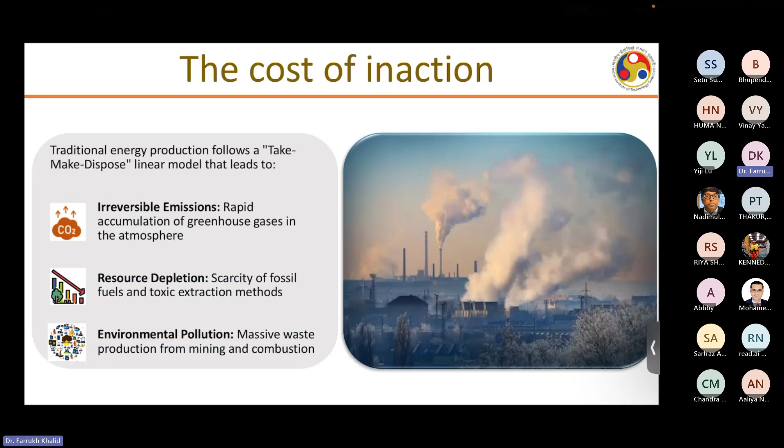And how do we come up with the conclusion of whether the energy solution we are looking at is a cleaner option? Primarily what we do is look at the technology from the lab scale, then look at its technical feasibility, then its commercial aspects, and later on also its environmental aspect. That usually, when you talk about the industrial level, is expressed in terms of LCOE and mostly GWP, the global warming potential of that technology.

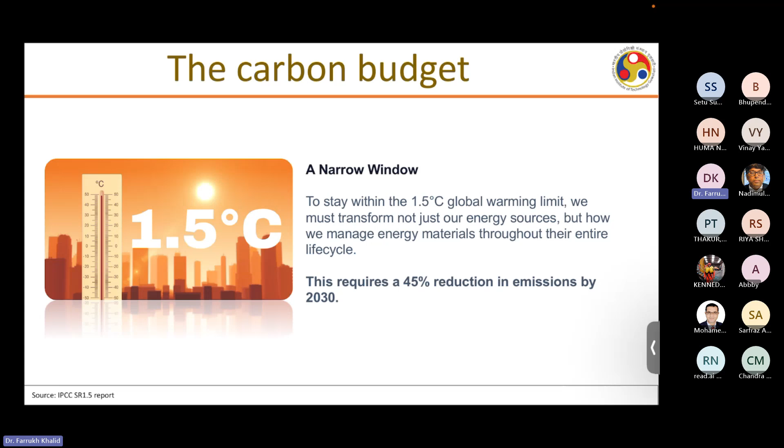So why do we all need this? Because it's very much obvious that the Earth has been regularly heated due to global warming issues, which is very pertinent. So in order to have this 1.5 degree global warming limit, it has been recommended that the reduction in emissions should be by 45%. And as discussed earlier, hydrogen could be one of the potential solutions for that.

So usually we all know that whatever aluminum we use is produced from bauxite, and then this bauxite is converted into alumina, and then from that alumina, using a Hall-Heroult process, which is an electrochemical process, we produce aluminum.

And then in secondary production, what we do is take whatever end products we have, like lots of aluminum cans, and whatever we get from windows and many other places, aluminum that is after its end use, and take it to the recycling factory. So that is also an energy consuming process, because most of the time this recycling is done at high temperature. So in order to achieve that high temperature, we need a source that can provide it, and that high temperature source usually comes from fossil fuel again.

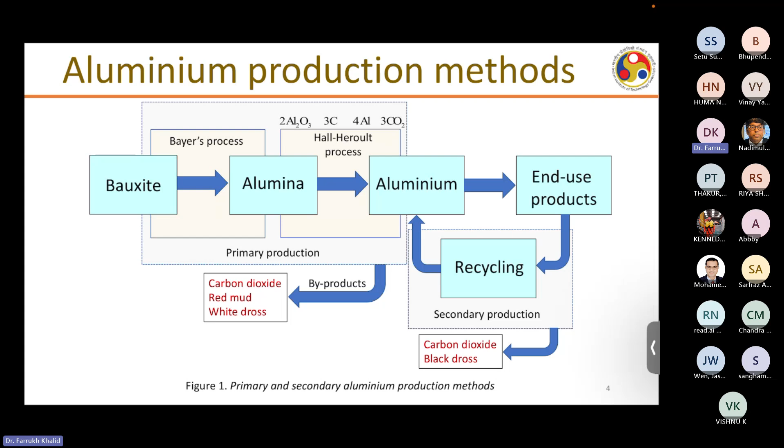So there are quite significant emissions being emitted at that period of time as well, the waste product coming out, carbon dioxide and black dross, when we do this recycling. This figure shows why we need to cut aluminum production related gas emissions, because it relates to around 3% of the world's industrial greenhouse gas emissions, and 8% of the global industrial electricity consumed in the production of aluminum.

When we look at it, most of the aluminum production emissions are coming from the electrolysis process, so that is around 70%.

That's why people introduced the concept that rather than going for the fresh hunt for aluminum, we can recycle it, which is basically a secondary production method. This requires around 95% less energy than we need to hunt or produce new aluminum, and it only emits 5% of the greenhouse gas emissions, which clearly shows the benefit of aluminum recycling, and helps in the circular economy concept. Through that we are trying to find different aspects we can use it for.

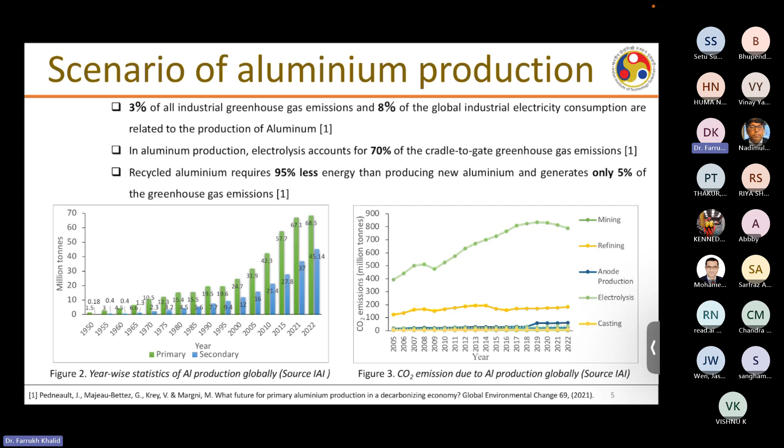So we need a strategy for how to utilize this scrap and convert it into more value-added products. One product we can convert it into is aluminum for sure, but can we convert it into some other more useful products? That is the journey we will talk about in this presentation, how to convert this aluminum scrap into fresh or new aluminum, or pure aluminum, and hydrogen. That is basically an amalgam of two processes: the aluminum production or recycling process, and thermochemical cycle for hydrogen production. It's an integration of these two, which we'll learn about in the coming half an hour.

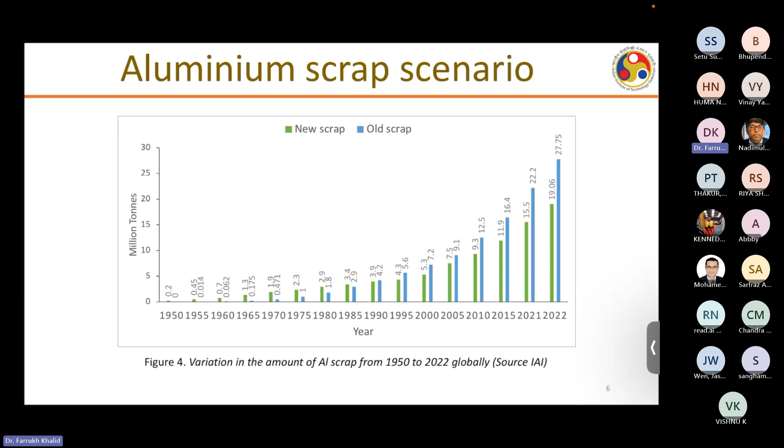One of the prominent reactions found in the literature is aluminum reacting with water, used to produce hydrogen. What happens is aluminum waste, whatever you have, is reacted with water, giving aluminum hydroxide, hydrogen is produced, and a lot of heat is generated. Due to the exothermic nature of this reaction, it becomes very difficult to control the hydrogen production rate, so this reaction is a little tricky to control.

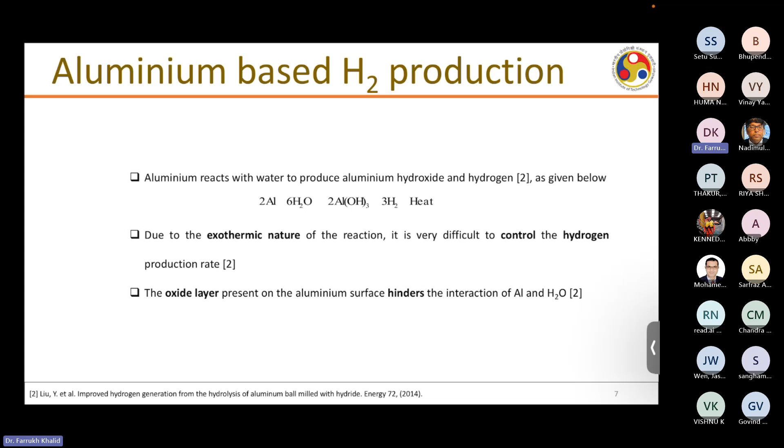People are looking for different methods to produce hydrogen from aluminum, and we have come up with another method we'll discuss. One issue with aluminum is that it's a highly reactive element. If left in the environment, it reacts with oxygen and produces an oxide layer, Al2O3, which hinders the surface of the aluminum, slowing down the reaction with water so you don't have enough reaction kinetics. That is another important aspect.

Just to brief about these thermochemical cycles for the new audience, since some people may have heard about it, some may not. The idea of this thermochemical cycle is that we want to split water thermochemically. As we know, any compound can be split, but you require a desired temperature and pressure to do it. For example, if we have water at ambient conditions, at 1 bar, and want to split it through the thermolysis process with the application of heat, you need a temperature in the range of 2000 to 2500 degrees Celsius, which is quite a high significant temperature.

But you can split it, so that water molecule will no longer be thermally stable. It can split into hydrogen and oxygen. So that is what we call a thermolysis process. Otherwise, what primarily we do is electrolysis; we have heard the name of electrolyzer everywhere. So what we are doing is that we are not splitting the water thermally, we are doing it electrochemically.

So in place of applying the thermal energy, we are applying the electrical energy. Thermodynamically, or ideally, you require 1.23 volt in order to split 1 mole of water. That's the ideal voltage, but there are certain losses associated with it: losses due to the membrane, and anodic and cathodic losses, which make the voltage around 1.8 volt.

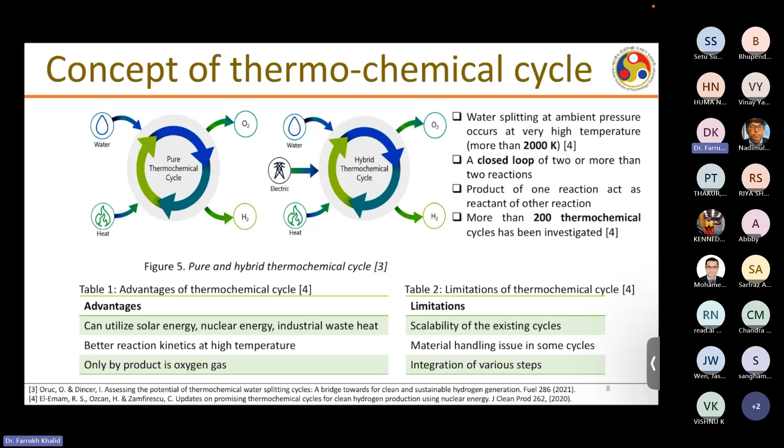And on the basis of delta H, we can comment about the reaction, whether this reaction requires heat to proceed or it will release heat. As we know, when delta H is positive, this shows that the reaction requires heat, or it's an endothermic reaction, and when it is negative, it will release heat, so it is exothermic. That we all know.

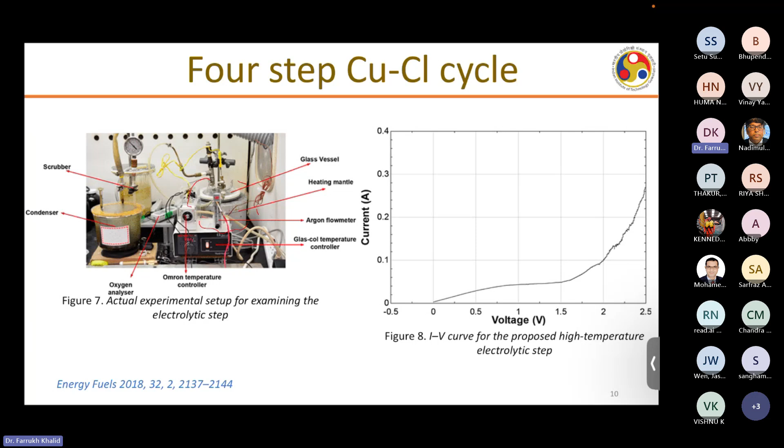The setup we used previously is a high temperature reactor, which is a vessel with a couple of electrodes and a couple of thermometers placed in it. The reactor is made of glass and heated with a heating mantle, and we put thermocouples to check the temperature inside and outside the vessel. Then we supplied the current, and through the current we electrolyzed the copper chloride, which is then used to produce it. So this was the electrolysis process.

What we do is first we heat this vessel using heating tapes, and once the desired temperature of 773 Kelvin is reached, we electrolyze the liquid copper chloride, because if you supply current to a salt in the solid phase, there will be no ions, so the current will not pass. So you need to change the phase. Either you make it aqueous, then the current will pass, or you liquefy it.

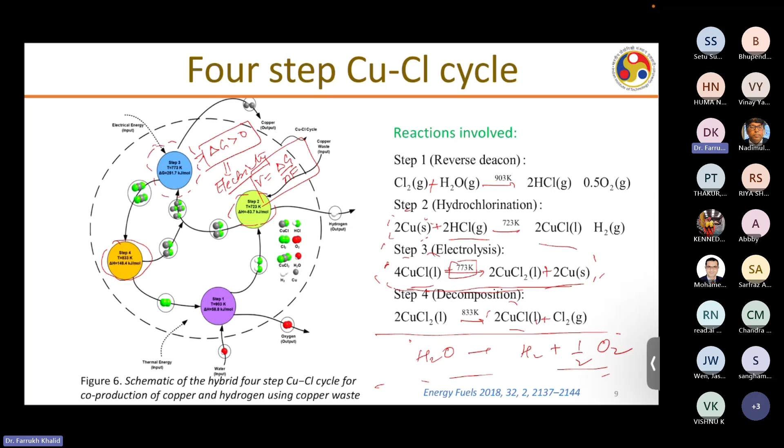The melting point of copper chloride is around 430 degrees Celsius, so we choose a temperature close to that, because any temperature beyond the melting point will be a wastage. To be on the safer side that the desired temperature is reached, we keep it at 773 Kelvin. Once this temperature hits, we supply the current through the potentiostat and electrolyze this product, and the electrolyzed products are further used in different steps of the cycle. So that was one thing.

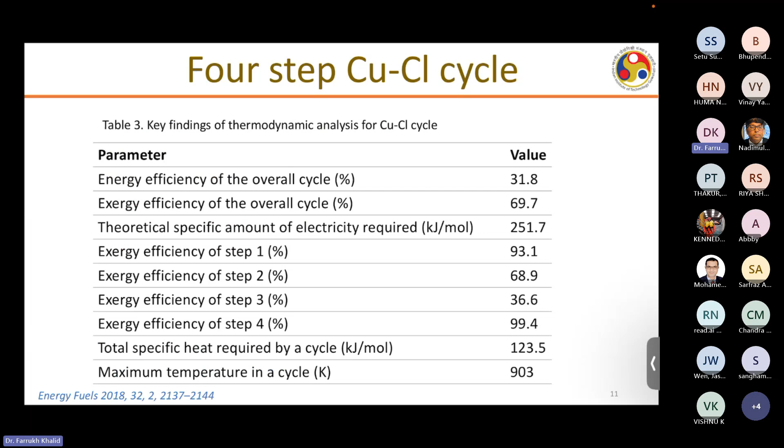This cycle was also studied thermodynamically. Whenever we analyze or come up with such cycles, our group first checks the thermodynamic feasibility of any new concept, usually through the first law and second law of thermodynamics. Once the results are acceptable, we go for designing the experimental setup. Similarly, in this case we performed the energy and exergy analysis of the cycle, and found the ranges were acceptable and comparable to other cycles in the literature, which gave us a boost to design our setup.

Now, coming to the motivation, what is the reason for the aluminum chlorine cycle? This is the current project I am handling at IIT Guwahati, and one of my PhD students, Vinay Yadav, is actively working on it. We have a grant from ANRF India on the utilization of the aluminum chloride cycle for hydrogen production and pure aluminum. So that was the idea.

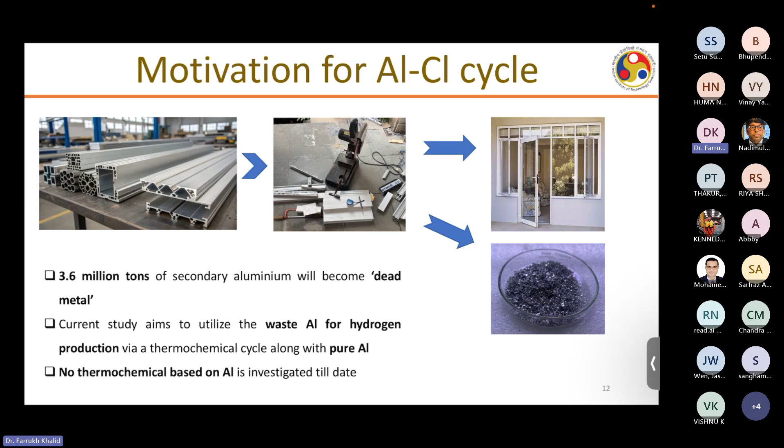As we can see, there is a lot of aluminum waste and many other things. So what to do and how to do it? That is what we call dead metal. So the innovation comes in that so far no thermochemical cycle based on aluminum chloride has been investigated in the literature. That gives us a very good boost that there is a window of opportunity where we can work on it, and then it can be used for hydrogen production as well as for pure aluminum. So this cycle again comprises three steps.

One is a hydrochlorination step, the other one is an electrolysis step. But the electrolysis carried out here is in the molten phase, so it's a salt electrolysis. We know that there are different phases of electrolysis: we have aqueous phase electrolysis, gaseous phase electrolysis, and liquid phase electrolysis. In this case, we have a molten salt electrolysis that we can classify as a liquid phase electrolysis. So we are liquefying the aluminum chloride powder, and then we supply the electricity to get the aluminum and the

chlorine gas. And then the third reaction, used mostly in the literature to produce hydrochloride gas, that is HCl gas, is basically the reverse Deacon reaction. In any of the thermochemical cycles, mostly the chloride-based ones, whether it is a copper chlorine cycle or magnesium chloride or any other cycle in the literature, you will find the reverse Deacon reaction. And this reaction is studied a lot in the literature. So we try to combine that reactor, how this will come into our reaction as well. That was the main idea.

As you can see here, the first step is a very key notable step that we were looking for. That is basically a hydrochlorination reaction in which we are reacting whatever waste aluminum we have with the HCl gas. The good thing with this is that, as I have previously discussed, if you want to use this aluminum scrap, mostly in literature people carry out the scrap aluminum reaction with water, and then it will form hydrogen and aluminum hydroxide. But this aluminum is a highly reactive element. It reacts with the atmospheric oxygen, and then a layer of Al2O3 gets formed, which hinders the reaction and it does not go properly.

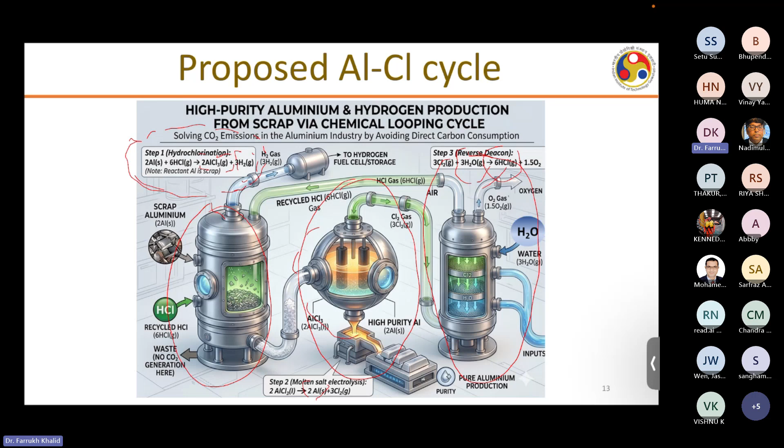So these are the challenges we have associated with this: the material selection, the reactor you are looking for, corrosion, HCl handling, the high temperature, and then how to do the product separation, which is very important, like AlCl3 and HCl, because as we all know, in any chemical reaction we never have 100% conversion. So some reactant will remain unreacted. So the separation is another challenge.

So that produced a lot of deliberation for us. Our team put a lot of thought into it, and then we came up with other solutions. I will discuss a little bit on that.

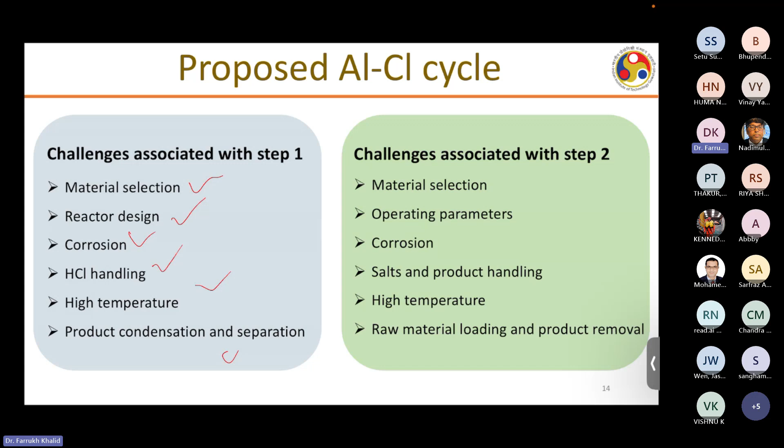And then again, the same challenges are associated with step 2, that is aluminum chloride, because again aluminum chloride is a corrosive thing, and then the material challenges come: you are melting it at high temperature and you are electrolyzing it, and how you are going to handle the salt and the products, the high temperature, and then material loading and product removal. So these are some of the challenges, and we try to address as much as we can.

So that's why our idea was to design an experimental setup for this, and simulate this hydrogen production method so that we know what the size of the reactor would be. And similarly an experimental setup for aluminum production, that is the electrolysis step, and then we did the thermodynamic analysis of the proposed cycle, and further we also did the techno-economic and life cycle assessment of this cycle, to see whether it comes under the definition of green hydrogen or not. And another idea is whether we are meeting this mission target or not.

So there is a vision from India that in the next decade, the price of hydrogen production will be around $1. So that is the mission. We say that for the next 10 years, for 1 kg of hydrogen, the price should be under $1. So we also see how close we are if we are using this.

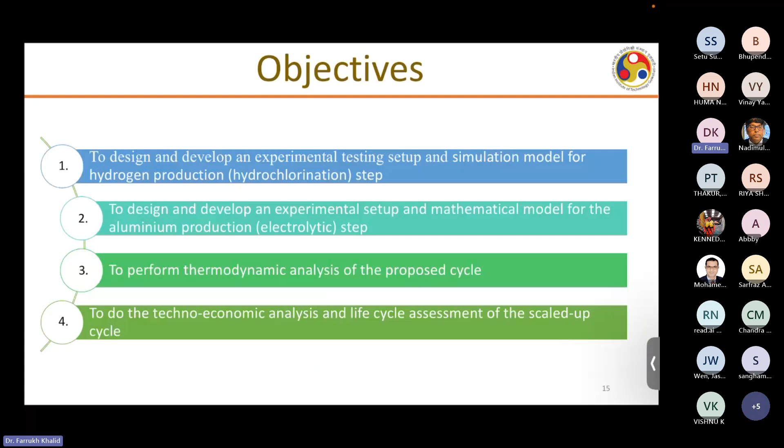So this is the experimental setup we have. We have designed basically a fluidized bed high temperature reactor. As we know, in this reaction of aluminum and HCl, the phases are important. For example, this aluminum waste we have is scrap, and it had some size, so we converted it into granules, small particle size, and we see what the effect of the particle is, and this is mostly in the solid phase. And HCl gas is basically a gaseous phase. So when you closely look at it, it's a solid and gaseous interaction: how the solid particles are interacting with the gaseous particles.

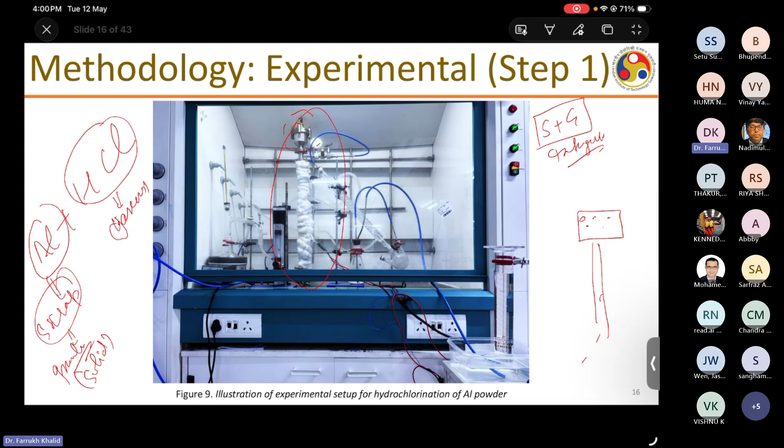So in this reactor, at the top we have a hopper where we feed our aluminum particles. And then HCl gas is fed from the bottom, and fluidization happens, and this is how the reaction proceeds.

So first we simulated it using the MPPIC approach, that is the multi-phase particle-in-cell approach. In this approach, we basically combine the Eulerian and the Lagrangian methods, and this is quite an efficient method that has been used in the literature. So we used different bed sizes, geometries, and all those things.

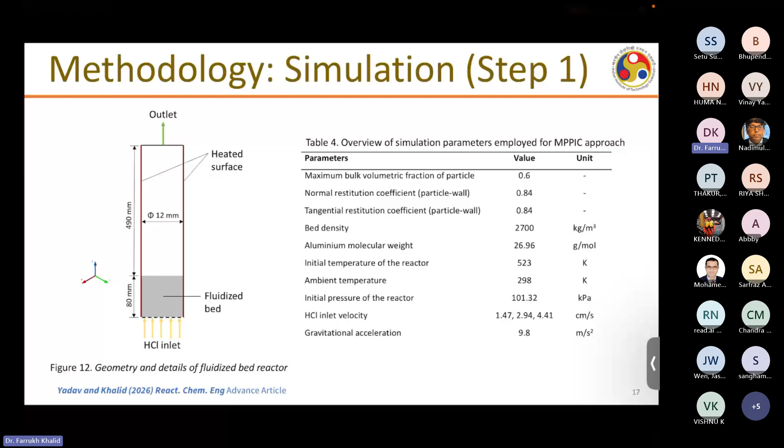So the surface is being heated. If anybody wants to know more details about this, they can go through our article, where we have discussed more about it.

Then the idea was to see the effect of the velocity of the HCl gas. We found that if the speed of the HCl gas is very high, in liters per minute, then the residence time of the interaction between the aluminum particles and the HCl gas is very low. However, the mixing is really good.

And when the velocity of HCl is lower, the mixing is not that good, but HCl has more time to interact with the aluminium particles. So when we do this, we found that in this case we have a better conversion, that is, more hydrogen is being produced.

In this case, around 80% of hydrogen is being produced compared to the other method. All this has been experimentally optimized. The temperature we found was 523 Kelvin, which we assume is a high temperature.

As I was mentioning about the material challenge, we were looking for a material that can sustain around 600-700 degrees Celsius and also handle the HCl gas. We found that a nickel-based material was a good one. So we purchased the reactor from a company, but we gave our design.

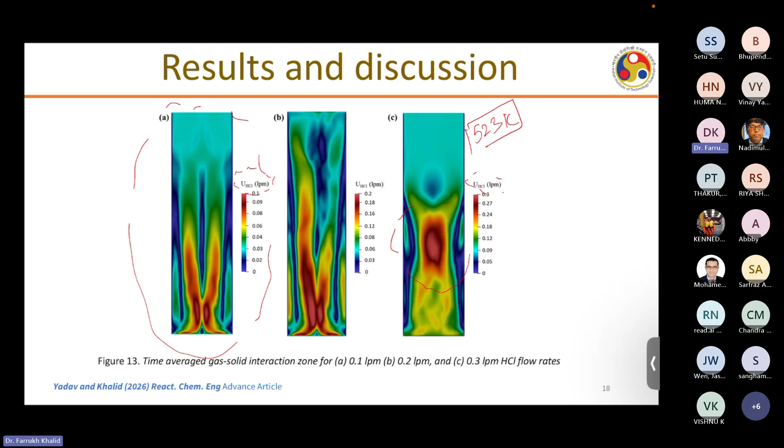So this is nickel-based, not stainless steel, because stainless steel would easily corrode. However, in other salt applications, we are using it.

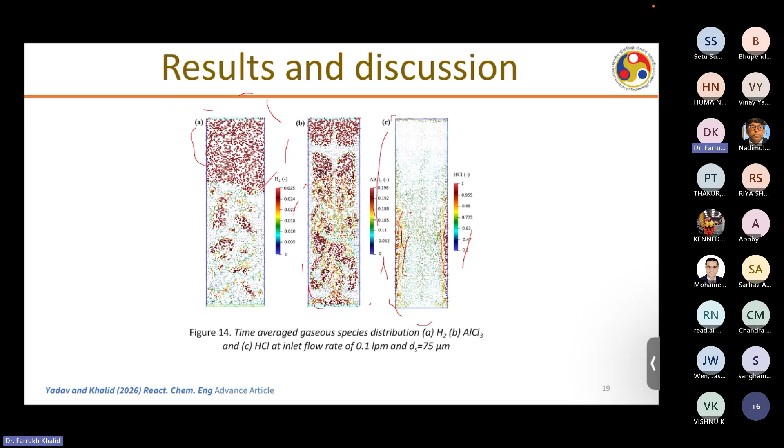The reason is that most of the gas has already been consumed; HCl has already been converted into aluminum chloride. So just some unreacted gas remains. Similarly, we also looked at what happens along the length of the reactor from top to bottom.

For hydrogen, if the flow rate is lower, the amount of hydrogen produced is more, because HCl has more time to interact with the aluminum particles. As we increase the flow rate, less hydrogen is produced. As we go up, we find hydrogen at the top, so at the top there is more hydrogen. Similar patterns were observed.

However, HCl is not at the top because it has already been consumed. Since we are feeding the reactor with HCl gas at the bottom, HCl has a higher concentration there, but as you go up, no HCl is left because it's already been consumed. This is the pattern we observe going up the reactor.

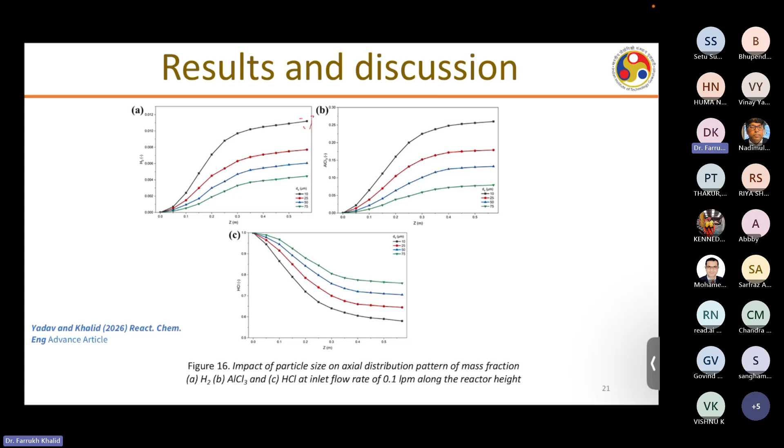Similarly, we also wanted to see the effect of particle size on this distribution. It has been observed that the smaller the particle, the more hydrogen you can produce. So it clearly shows the impact.

Then we compared our simulated and experimental HCl conversion. We also carried out the experimental step of this reaction. However, I'm not showing the graphs for this because that paper is still under review, so I suggest not to show those results.

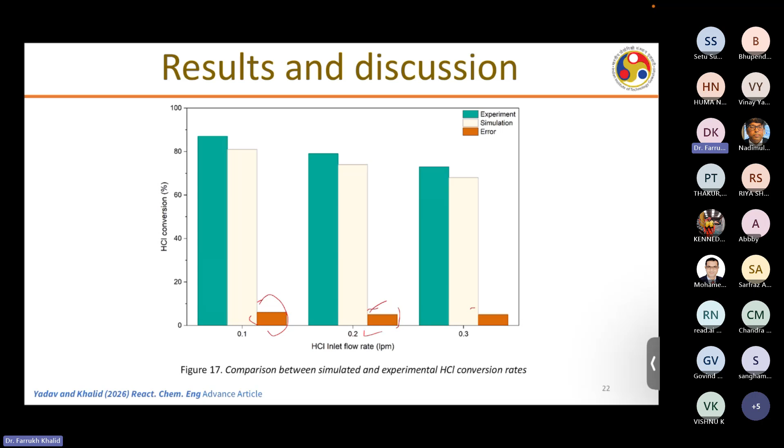I'm not showing those results, but just giving you a brief idea that our experimental results were in good agreement with the simulation, for different flow rates. Within the range of 5 to 6%, our model holds. So what we predict from the MPPIC model and what we did in the experiment are in good agreement, with an error of around 5 to 6%.

If you want to know more details about this reactor and vessels, I'm happy to share it with you if anybody is interested.

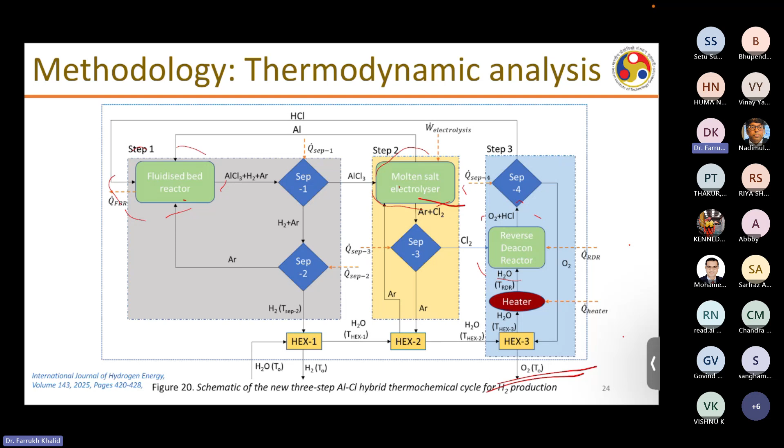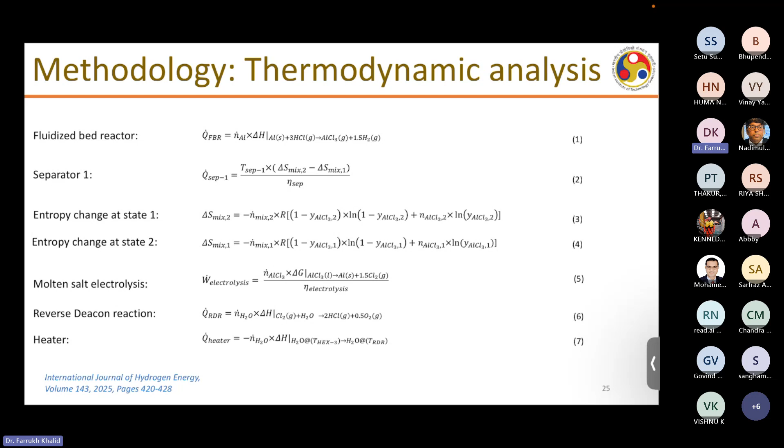We performed the thermodynamic analysis, and at the end we calculated the heat flow rates, mass flow rates, and many other things. We were interested in calculating the overall energy and exergy efficiency of this cycle so we could compare it to other existing cycles in the literature. Since the main product of this cycle is hydrogen, up to now we didn't talk about pure aluminium - we were just taking hydrogen into account.

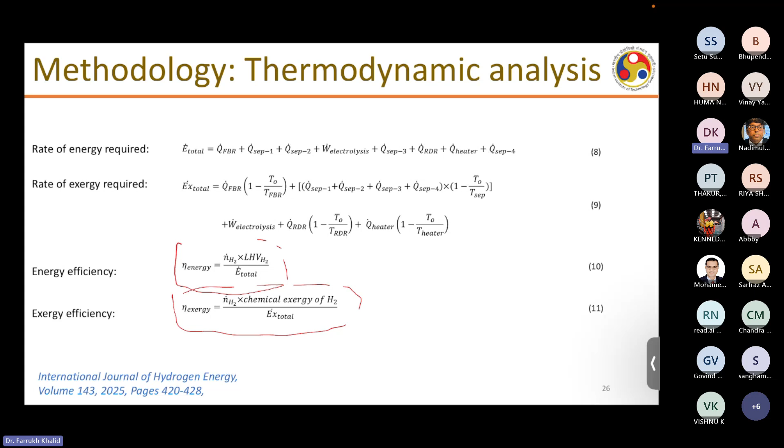We looked at the effect of temperature and other parameters. This cycle shows a theoretical energy efficiency of 44% and exergy efficiency of 48%. When we take the real conversion into account, around 80% at our temperatures, we achieve an energy efficiency of 39% and exergy efficiency of 38%.

When you closely look at it, compared to water electrolysis - typically in water electrolysis, to produce 1 kg of hydrogen, whether using PEM or AEM methods, you require roughly 50 to 55 kilowatt-hour units. However, in our case, we require only 20.28, around one-third of that. However, the thermal energy requirement is a little higher on that side. But when you do the overall conversion, you find our cycle is much better.

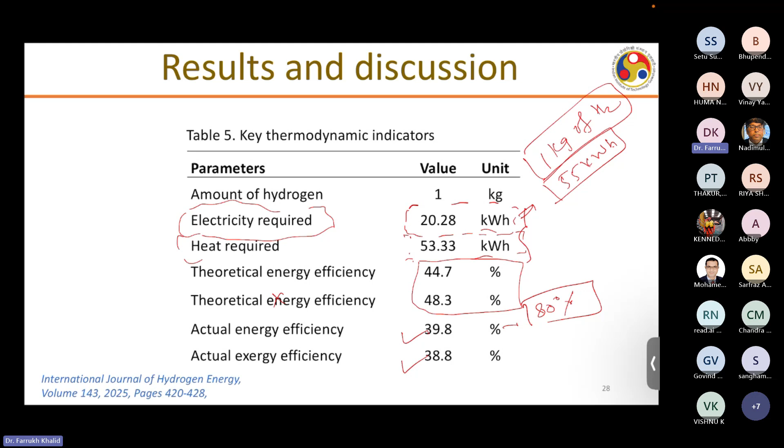This can easily be coupled to a solar thermal reactor or any waste heat plant, because the amount of heat required was around 300 to 400 degrees Celsius. This shows the benefit of such cycles, which can be coupled to nuclear reactors or waste heat, or be a good option to recover waste heat combined with renewable energy. The electricity can come from a renewable source, like a PV plant, and the heat can come from waste heat, since industrial waste heat can be in that range.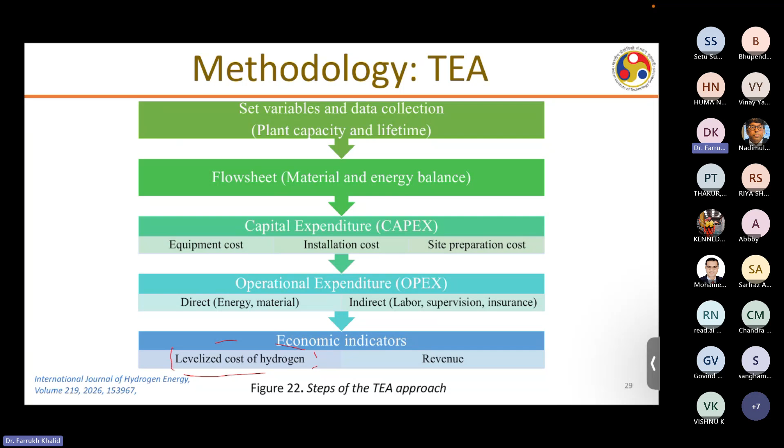And then furthermore, in order to find the levelized cost of hydrogen, we perform the techno-economic analysis. We use certain numbers, scale it up using some relations in the literature, and then do some math for levelized cost of electricity and all.

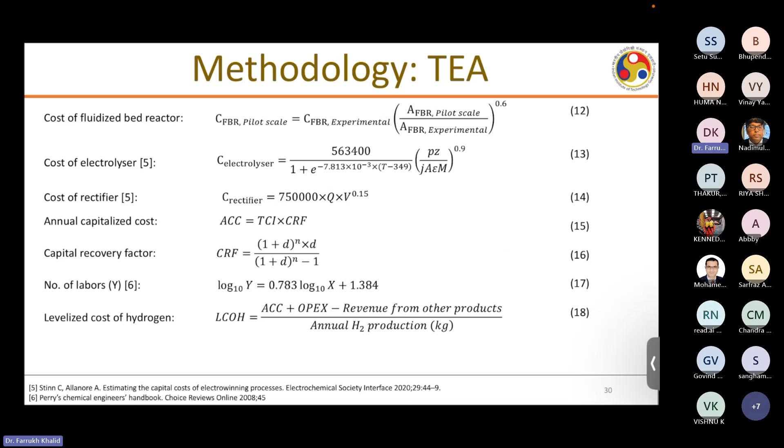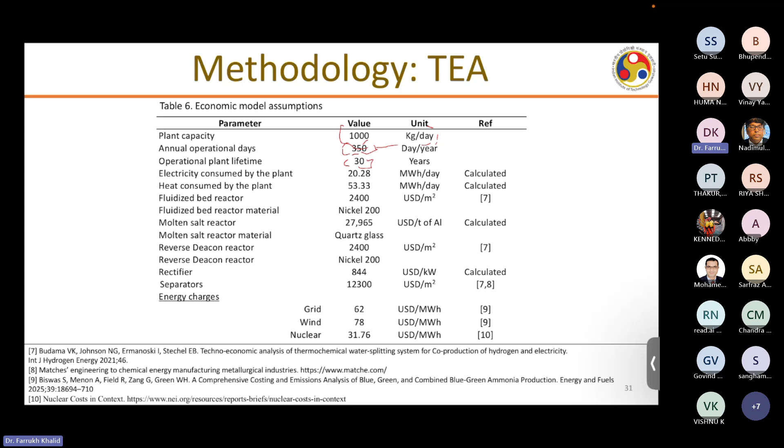We consider certain assumptions, how much it will cost if we are taking the electricity from the grid, or from wind and from nuclear. Then the capacity, we assume around 1000 kilogram per day, and the plant runs 350 days a year, with a total life cycle of around 30 years, which is quite good compared to literature for these thermochemical cycles.

That is 25 to 30 years usually considered. And then similarly, we also include the price for the scrap aluminium, how it is going to be charged for us, and other balance of plant costs.

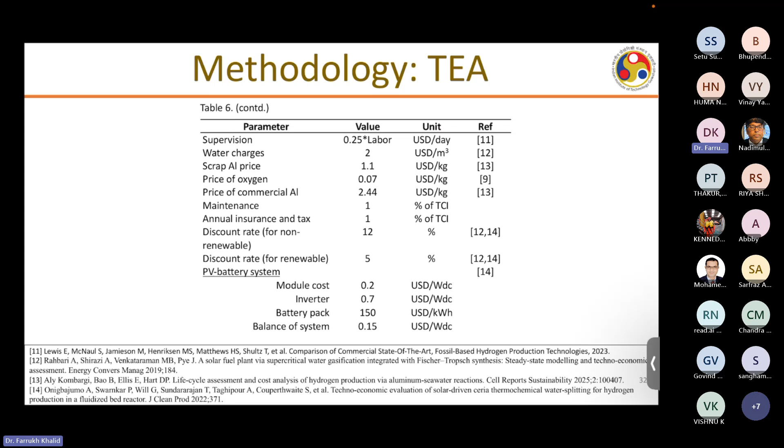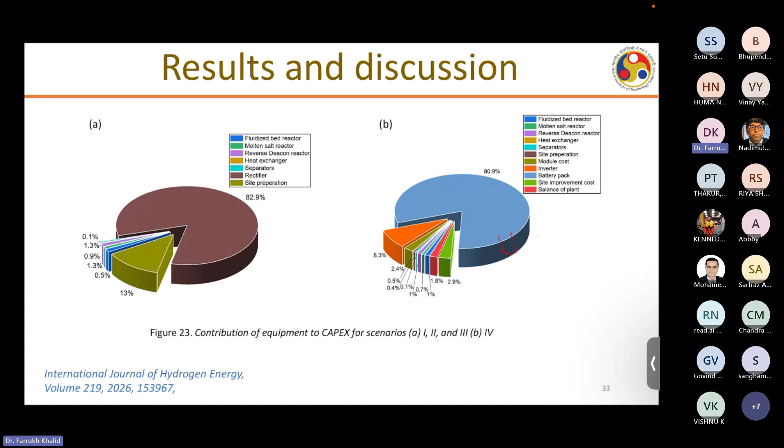When we did it, we found roughly there is a capex cost, and the fluidized bed reactor does not cost as much, but most of the cost goes into other factors when you look at different scenarios. In this cost, the fluidized reactor had some good amount of cost, and the battery pack had more cost.

So we consider there are different scenarios. Typically we consider 4 scenarios and 5, for the operation and all. When you closely look at that, what we are really interested in mostly is the levelized cost of hydrogen with and without oxygen sales.

If you are purchasing the electricity from the grid, we found that the cost of hydrogen is around $3.01. For wind-based it is 2.61, for nuclear it is 1.35, and for PV it is 0.78.

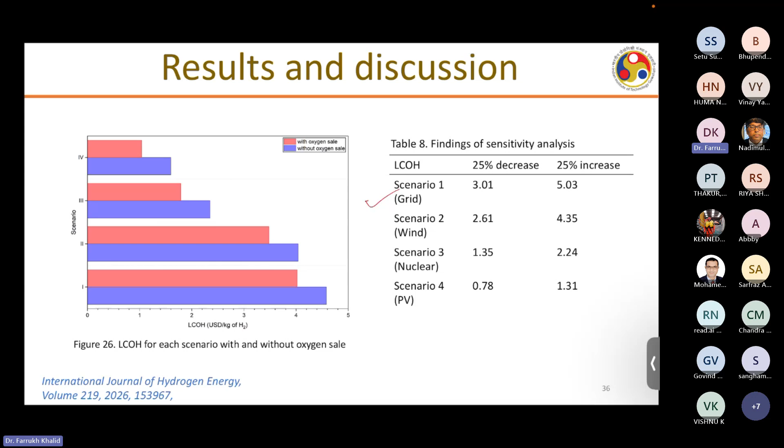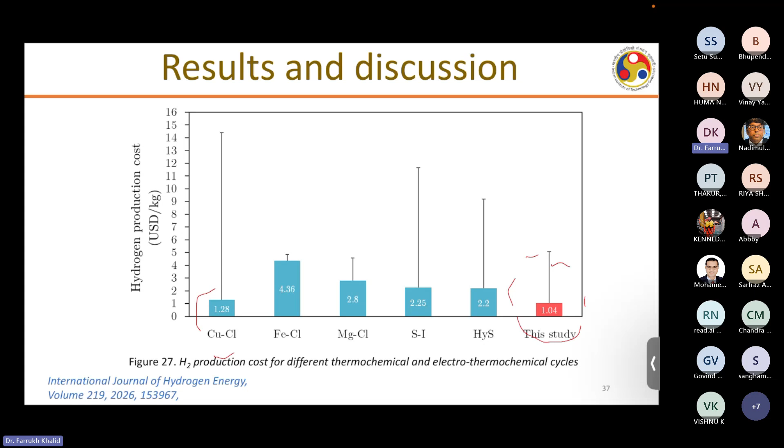This clearly shows that our benefit can come into that picture. In order to see the hydrogen production cost per dollar, our study suggests around 1.04 if we take into account the cost of the aluminium produced as well. That is quite comparable to its counterpart copper chlorine, which is 1.28. So our studies have a little more advantage compared to that.

So I'm finally coming to the conclusion. We have developed a novel electrochemical cycle used for hydrogen production and pure aluminium. We studied this cycle extensively through experimental simulation, thermodynamic, economic, and environmental points of view.

I didn't show the experimental result for hydrogen gas produced, but we found the purity of hydrogen produced was around 99.5%, which can be further ultra-purified using purification techniques like membranes, so it can be fed into other processes like fuel cells. Otherwise, it is good for industry where we need decarbonization, and this produced hydrogen can be used in the steel industry or other processes.

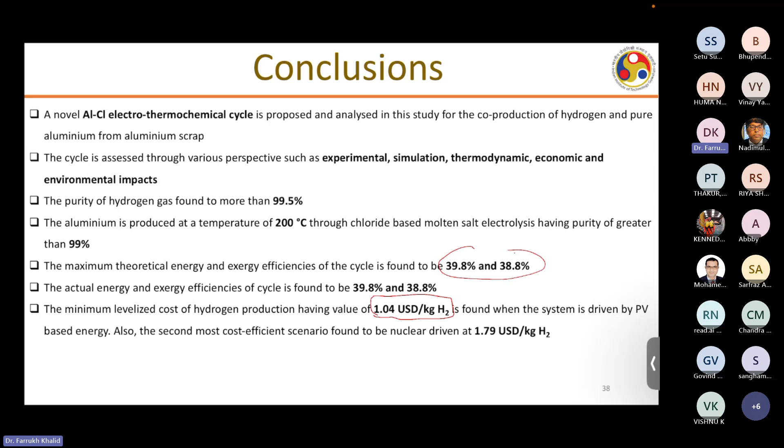The produced aluminium achieved a purity of around 99%, and energy and exergy efficiencies were around 44% - I said a wrong number earlier, 39 point something, but it was around 44%. The cost of hydrogen produced is around 1.04, which clearly shows that the DOE target can be achieved through this cost of hydrogen production.

So we were able to demonstrate the aluminum chloride cycle's potential for sustainable hydrogen and aluminum production. However, there are certain aspects that need further investigation - that is going to be our future work. First is how to integrate these 3 steps. For now, these 3 steps work solely, independently of each other, but integrating them is going to be one of the biggest challenges.

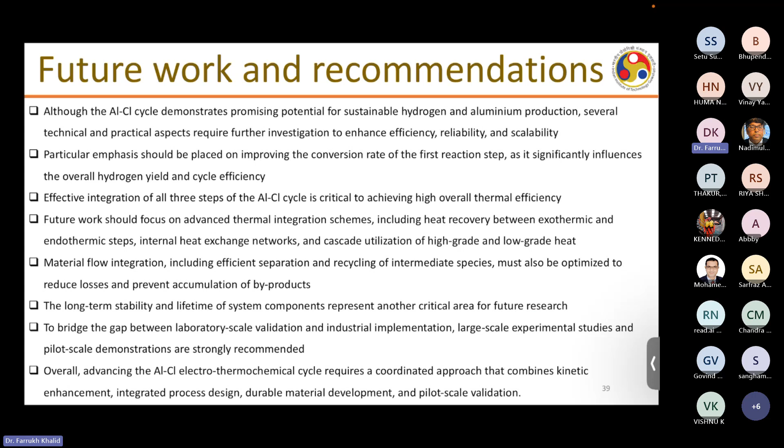However, that does not limit its application. So one can choose one of the reactions and use it for that kind of purpose. So that is one thing.

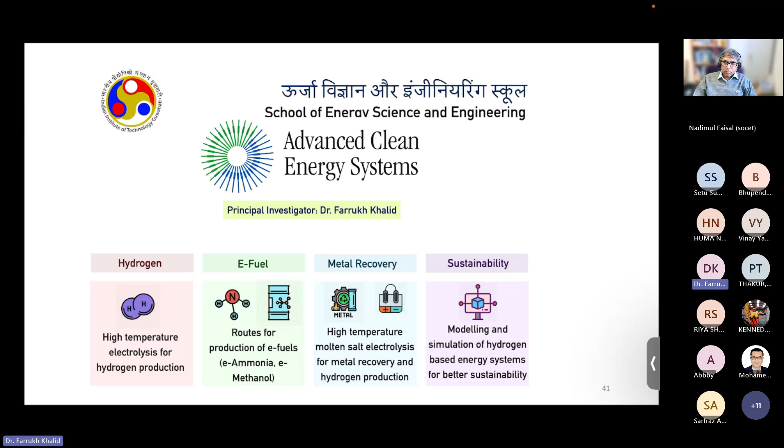Just a brief about what we do at Advanced Clean Energy Systems: our studies focus on hydrogen, e-fuel, metal recovery and sustainability. Right now I have a team of around 12 people closely looking at clean energy solutions. This is our campus, IIT Guwahati, and I welcome participants to visit. Just drop me an email and we can find a suitable time. We have a very good campus and would be happy to host you at our institute.